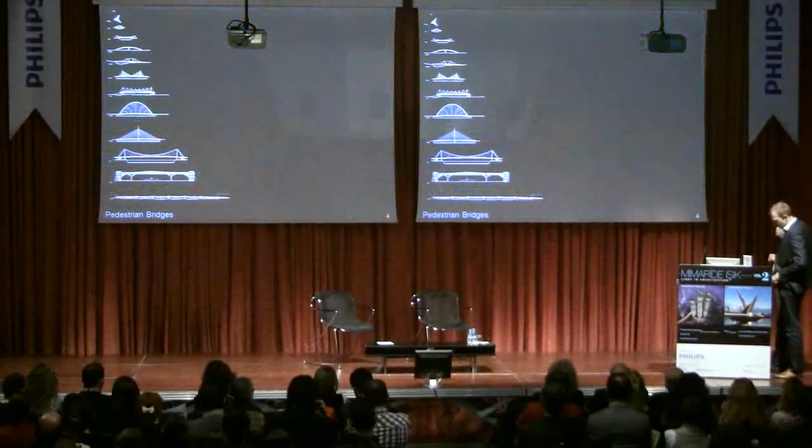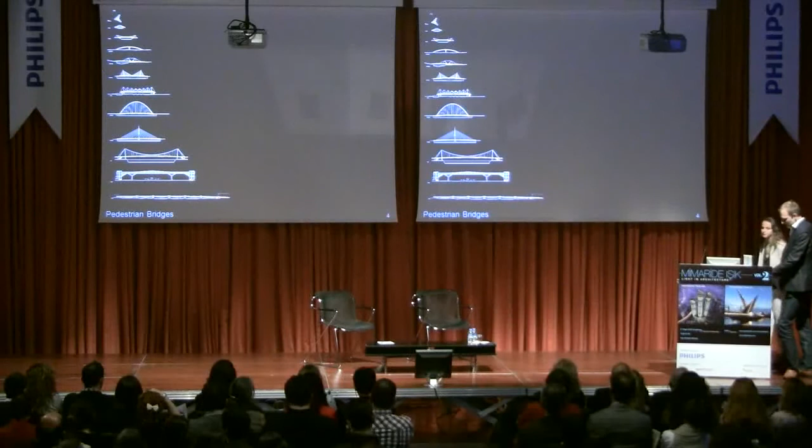What I love about my job, because I'm a specialist bridge designer, not buildings on the whole, is the variation in the projects in terms of the appearance and the scale. This slide shows the variety of different footbridges that I've delivered over the years.

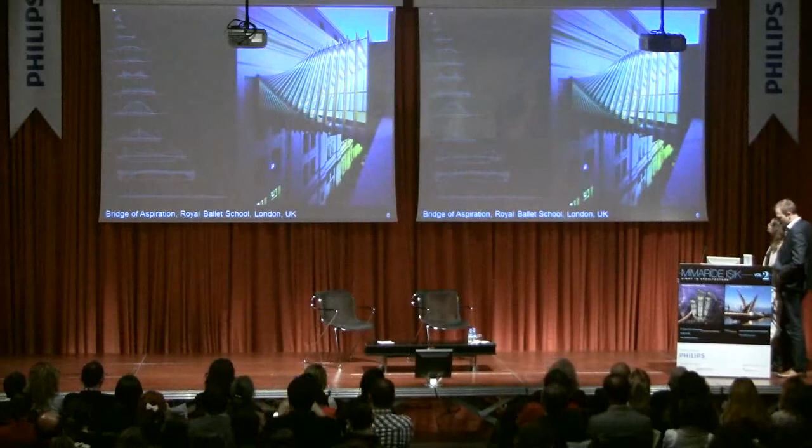This is one of the smallest bridges I've ever worked on - the Royal Ballet School Bridge in Covent Garden, built to link the ballet school with the Royal Opera House across a narrow urban street. Speirs & Major were the lighting designer.

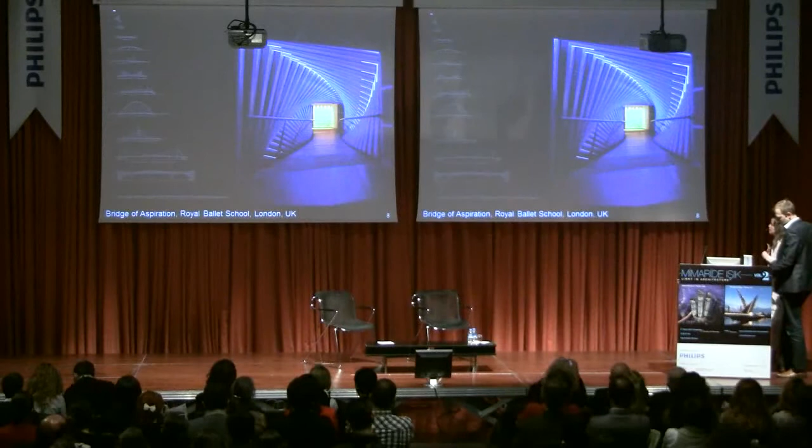The really interesting thing about this project for us, in terms of the client wanting an aspirational project, is that the link is only 9 meters wide. So the creation of a bridge in this location could have been quite a simple outcome. But Wilkinson Eyre took it to quite a different level with their architectural design, and obviously we wanted to integrate within that design without adding an extra layer.

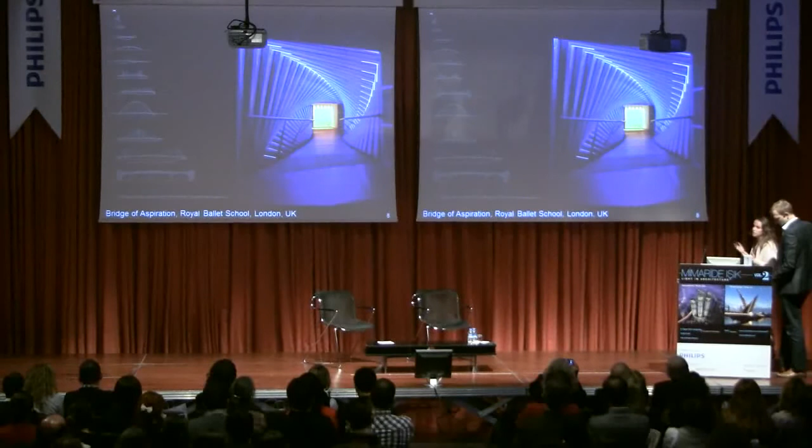By day, the bridge has a life of its own with the way the daylight moves over the structure, and by night we wanted to give it its own impression, but integrating so that we didn't impact it by day. So in the corners there's a very delicate recessed acrylic backlit with LEDs, so that it just reinforces the movement of the bridge by night.

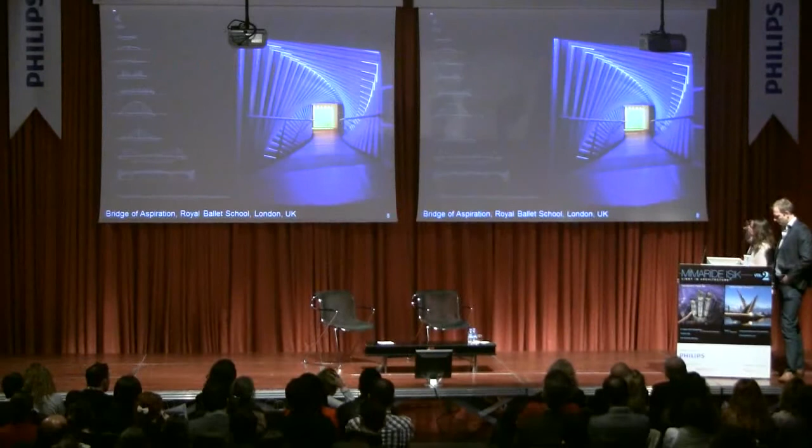So as the structures get longer and the spans become more onerous, you can see that the expression of the structure itself becomes more pronounced. This is a footbridge based on an inverted Fink truss that we each completed a couple of years ago.

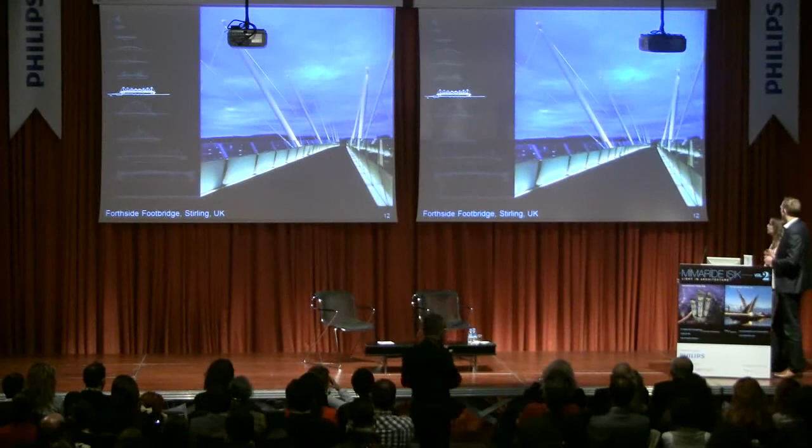And again, by night, what's interesting about this bridge is we've only lit the inside of the vertical components of the design. So in elevation, the bridge almost turns itself inside out by night. It gives you this texture and this depth to the nighttime image of the bridge.

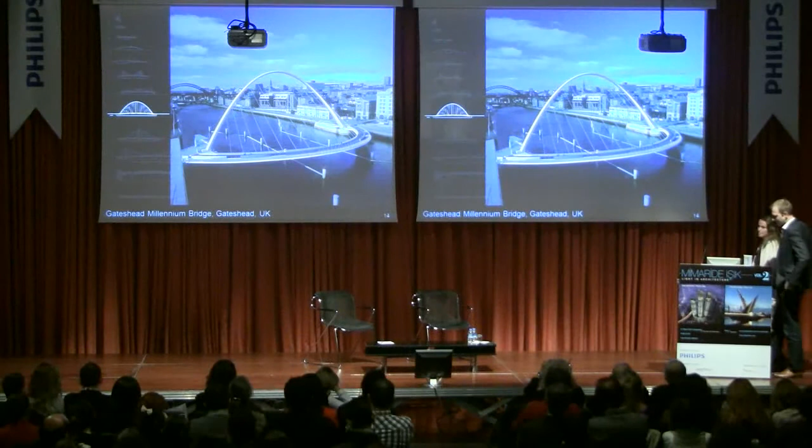As an architect, what I love about designing bridges is that you start with the big idea, the concept, and then you develop a structural form with the engineer. After that, you're straight into the little details. How does the handrail connect to the deck? How is the soffit of the bridge expressed? Does the deck touch the ground?

All the design in between that architects normally complete for a building is largely irrelevant. There is no insulation or weatherproofing to worry about, and on the whole there is nothing that can't be seen or experienced. So for me, bridge design distills architecture down to its essence, and you only do the fun bits of design.

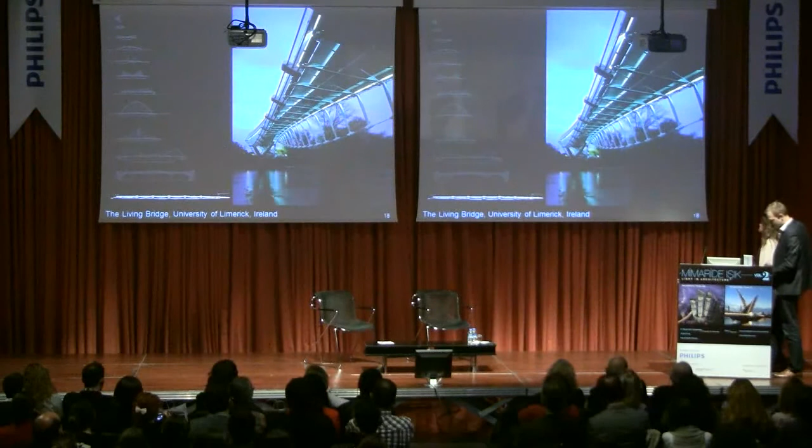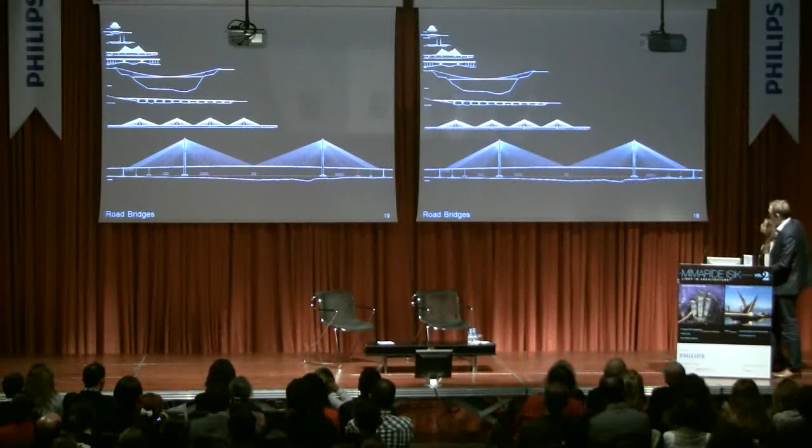Something else I love about the work is the variety. So we started off showing you a 9-metre long bridge in Covent Garden, but I also worked on this bridge at the bottom of the page, which is the Sutong Crossing in China, which has a clear span of 1.1 kilometres, and when it was completed in 2007 was the longest bridge on the planet for a time.

But we're talking about this bridge, which is the Twin Sails Bridge in Poole, which, on the scale of things, is quite a modest structure, but hopefully in the course of this talk we'll show you how it's a very successful example of the collaborative process between the different disciplines.

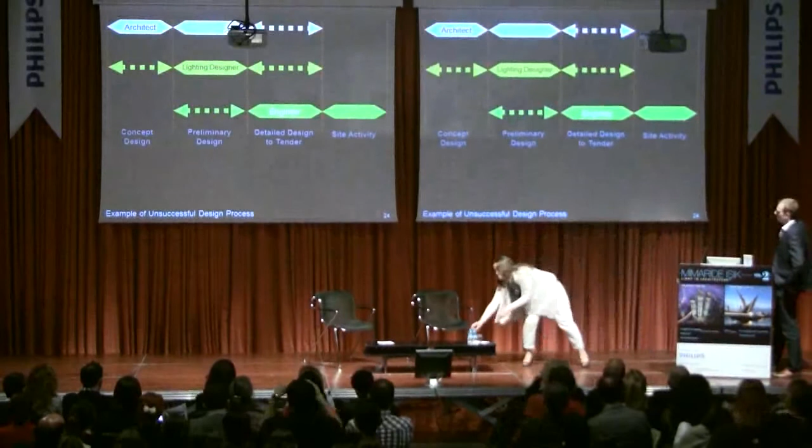So how should multidisciplinary teams work with each other, each with their own skills and agenda, to produce a single, beautifully coordinated project? To answer this, we're going to start by giving you some examples of how the design process should not work. So this slide shows a simplified design program for an unsuccessful design process.

In this scenario, an architect is invited to develop a concept for a bridge. The client, who might have little or no grasp of structure, buys into the concept, lured by its visual aspects and often a render of a colourful lighting scheme. The architect is commissioned to develop the design, and only then is an engineer employed to make the design stand up.

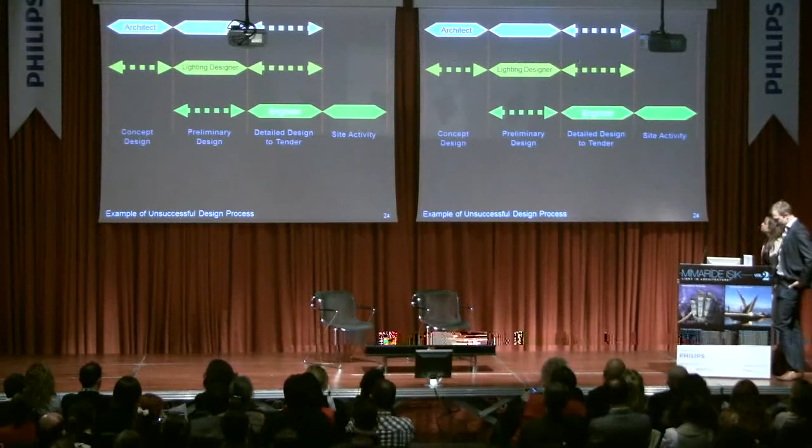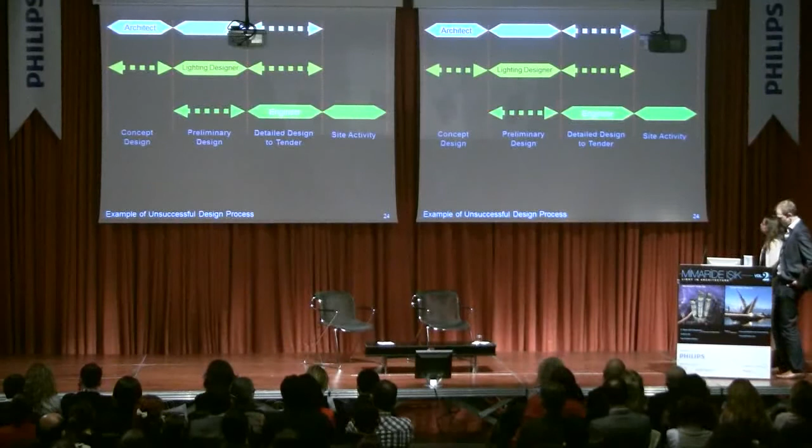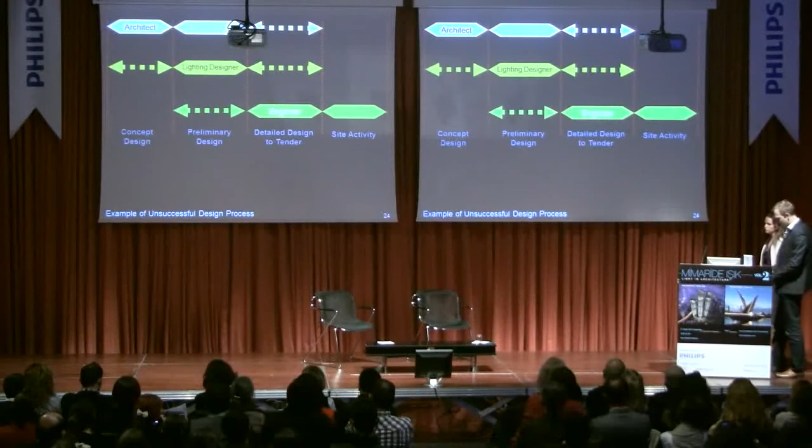From my experience, this approach seems to be normal operating procedure for bridge procurement in the Middle East at the moment. And sadly, it's also becoming more common in the UK, with the Royal Institute of British Architects launching often unsuccessful bridge competitions. I'd like to reiterate that this is not how we think a bridge should be procured. An engineer needs to be involved from the outset because they understand the physical fundamentals of structures. Some architects don't. So the result of a program is a structure like this one.

This is the Dubai Smile. It is unique, but there are sound physical reasons why nobody has developed a structure like this before, especially to carry a major highway several hundred meters over water. At first sight, the structure appears to be a suspension bridge, but the catenary is an inverted arch, and the arch isn't supported at its ends, but cantilevers from a position over the water.

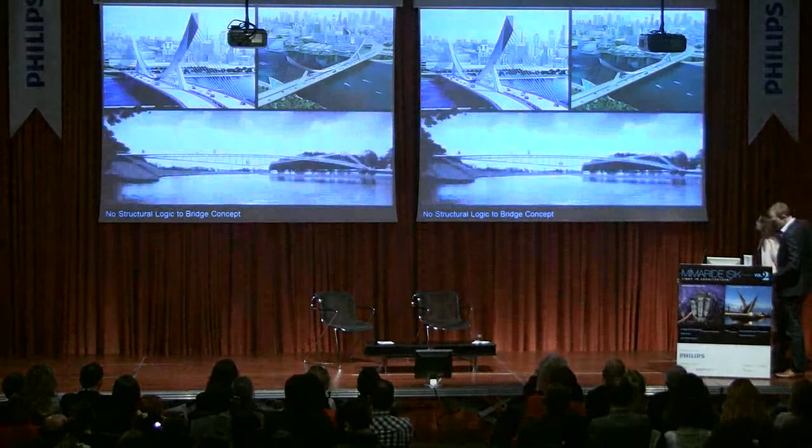Sadly, there are more examples like this. This was a competition for a footbridge in Krakow, and this is the winner. You'll notice that the weakest part of the bridge, where the arch meets the underslung catenary, there is no support, so simply put, this bridge can't stand up.

And here are two infamous examples from the UK. The first is the Wear Bridge in Sunderland. This is the competition-winning scheme. Although an engineer was involved at the outset of this design process, he was swayed by the architect's insistence that he didn't want to have backstay cables to transfer the loads from the mainstays that support the roadway. The result is undeniably dramatic, but completely inefficient and therefore gratuitously costly.

The second image is the winner of the Neptune's Way footbridge competition in Glasgow. Having won the competition and been commissioned to develop the design, the engineers very quickly realised that the architect's vision could not be made to work, and as a result the project was abandoned and a design and build competition was relaunched for the same site several years later.

All of these are examples of over-ambitious architects trying to establish unique icons for their clients. The results might be unusual, but they are visually confusing and misinformed. For these designers, the bridge is seen as a sculpture on a massive scale.

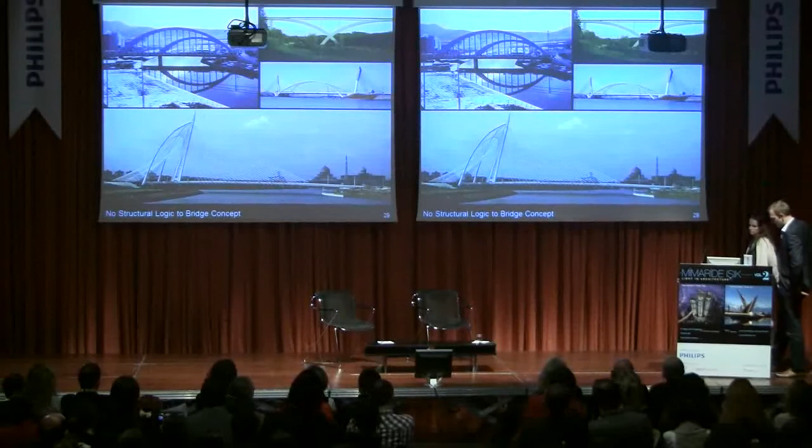The original purpose of the bridge, to cross an obstacle, is lost in the clamour to provide something visually arresting and attention-grabbing. Bridges are performing structural gymnastics to support themselves across the void. Designs have lost sight of their reason for being, and context becomes meaningless, and references to the environment being traversed are ignored or even considered irrelevant in the pursuit of a gimmicky object which demands attention.

If we look to the United States, the reverse problem is true. In America, architects are commonly perceived by clients and engineers to add fluff to bridges. Architects are there to choose the colour of the paint or to apply some cladding, often pseudo-historic, but not to inform the design in any meaningful way.

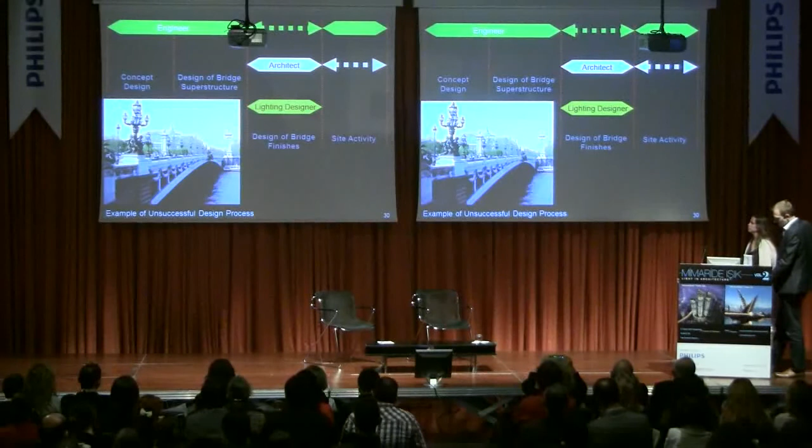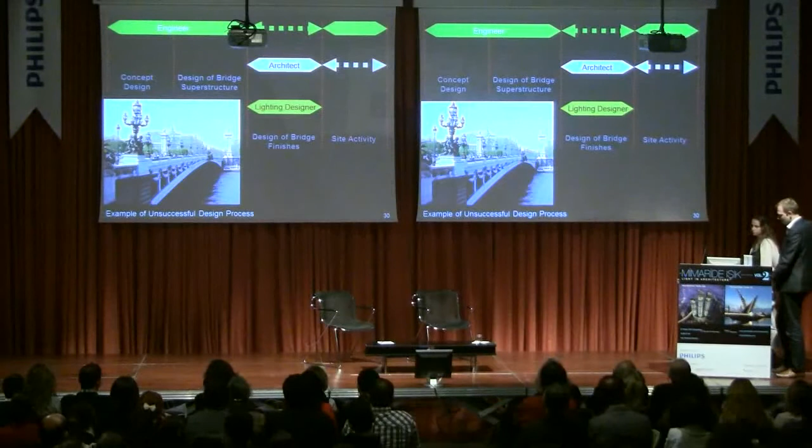This programme represents a common American model for involving an architect in the design process. An engineer develops the design for a bridge, working alone to establish the span configuration, choose the typology of the structure, its scale, its alignment, and in short, the whole structure is often predetermined before an architect or a lighting designer becomes involved.

The result is that American bridge architects simply design balustrades, apply some cladding, or propose motifs and relief to the engineer's concrete. At this stage, it is too late to input into the fundamental spatial arrangements of the bridge. The value that an architect could have brought to the design process is lost.

And for a lighting designer, it's even worse. They find themselves simply choosing light fittings to retrofit to the structure as an afterthought. So, how should lighting designers, architects and engineers work in harmony to produce a beautiful yet functional structure?

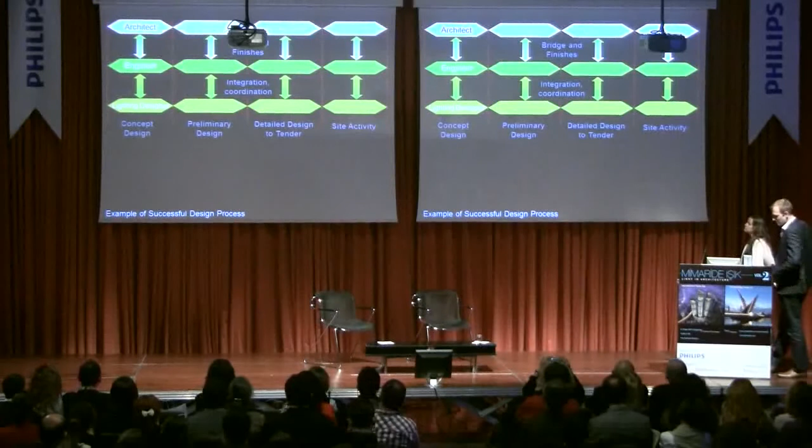In our experience, this is best achieved by close collaboration for the full design process. The design process is completely iterative, with each discipline reacting to and evolving their design ideas in concert. Each designer is respectful to the skills and experience that their counterpart has to offer, and every detail can be resolved such that it is both functional yet beautiful.

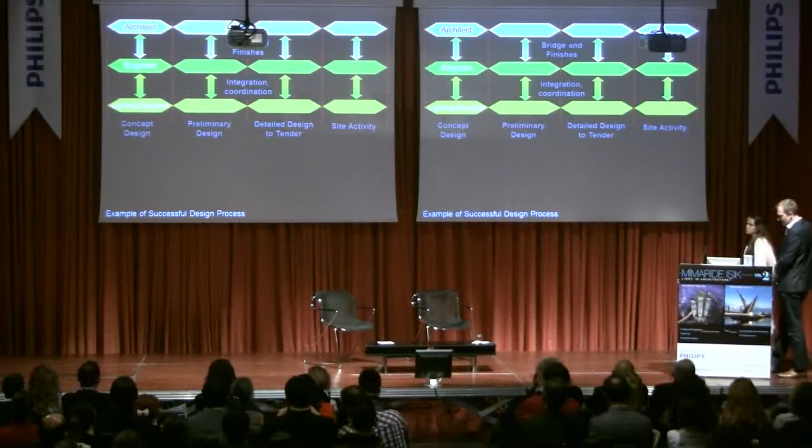The bridge and its finishes are designed as a homogeneous object and not as a superstructure with applied adornment. For the rest of this talk, we intend to demonstrate this process with our case study. For this project, the lighting designers, architects and engineers developed the project in parallel as a cohesive product from inception to completion. I'm going to start by giving you some background to the project.

For those of you not from the UK, Poole Harbour is on the south coast of England. The harbour is said to be the second largest natural harbour in the world, behind Sydney Harbour in Australia. It's a stunning natural habitat and an area of special scientific interest. The bridge crosses a tributary leading to a large bay to the north of the harbour itself.

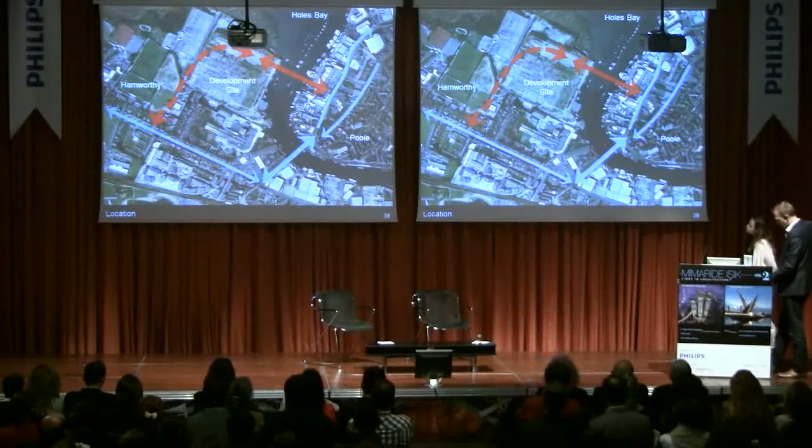Holes Bay is a popular mooring location for private yachts. It's also where Sunseeker motor yachts are manufactured and where the local lifeboat station is based. And as a result of this channel linking Holes Bay with Poole Harbour, it is extremely busy, and the existing bridge opens once every hour, every day of the year.

However, with populations increasing, the existing bridge has also become a bottleneck for road users, and when out of operation causes major access problems for the local residents. As a result, the client, the Borough of Poole, launched a competition for a new bridge in 2002.

Following their success on the Gateshead Millennium Bridge, the same multidisciplinary team of Gifford, Wilkinson Eyre Architects and Speirs and Major reassembled to enter the competition.

As always, the first thing we did was visit the site. What struck us was the horizontality of Holes Bay and Poole Harbour, and of Poole and its suburbs. There is very little man-made here to punctuate the horizon, so you get long-reaching views to the New Forest and the Isle of Purbeck, both local beauty spots. As a result, we felt the bridge should be very low-lying and modest, with little structure above the deck. Since the bridge will be down most of the time, it should be calm, modest and discreet.

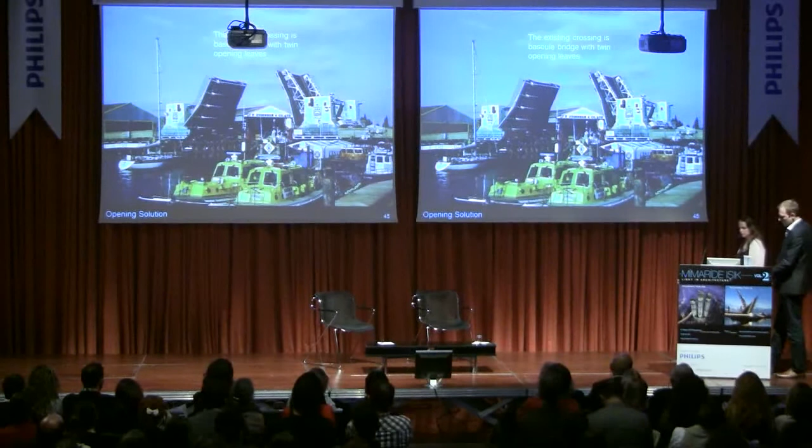Having decided the bridge should be as low-key as possible when shut, we needed to decide how it opened. The existing bridge is a bascule bridge: twin leaves pivot open about a horizontal transverse axis, like the drawbridge on a castle. The client preferred bascule technology based on the robustness of their existing structure, and as a design team we were also drawn to it since it didn't rely on large overhead lifting mechanisms. Probably the most famous example of a twin-leaf bascule bridge is Tower Bridge in London.

However, there is one issue with this type of mechanism. When both leaves are down, they act as horizontal cantilevers. For them to take vehicular traffic, it's necessary to lock the opposing leaves together at mid-span over the water to avoid large deflections under heavy loads. More often than not, it's these remote locking mechanisms that fail rather than the opening mechanism itself.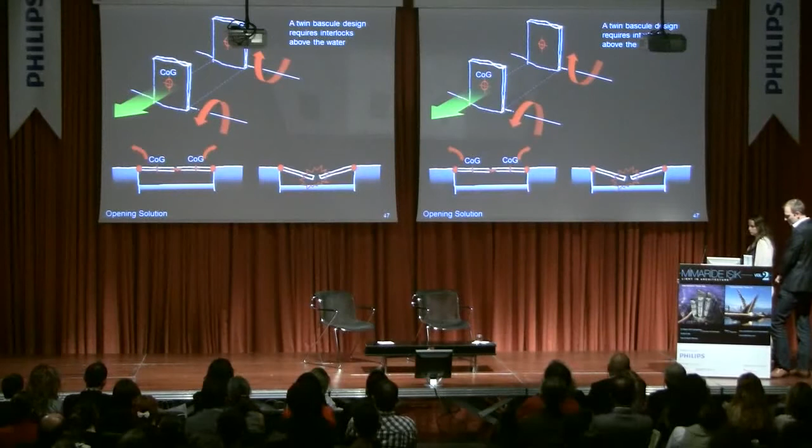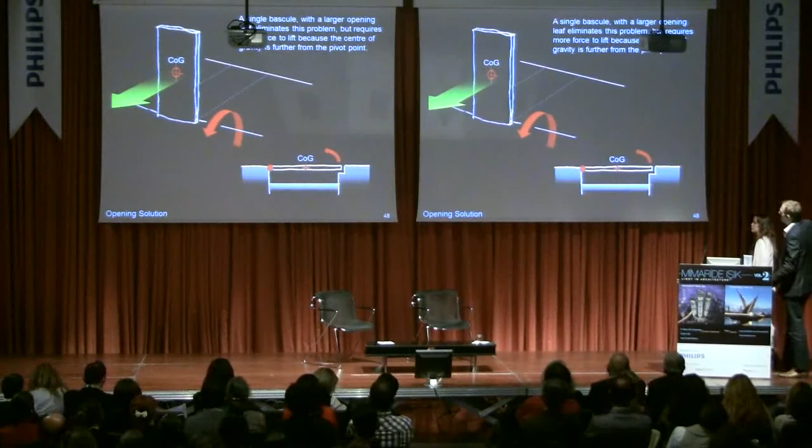One way to avoid this problem is to use a single bascule leaf, twice the length of the dual system. The advantage is that the lifting leaf can be laid down onto the opposing abutment - there are no locking mechanisms, and the bridge is held in place by gravity alone. The disadvantage is that for the same size opening, the centre of gravity of the mass to be raised is further from the pivot point, so the bridge uses much more energy to mobilise it. For this reason, single-leaf bascules tend to have very large structures, which was visually not in keeping with our preference for a low-key and modest design.

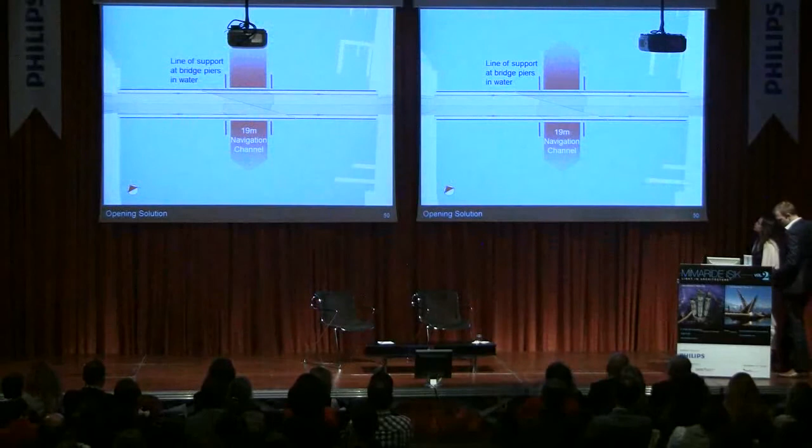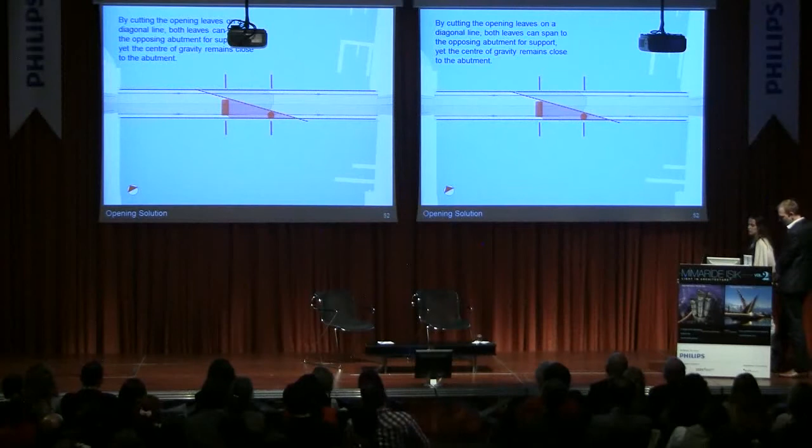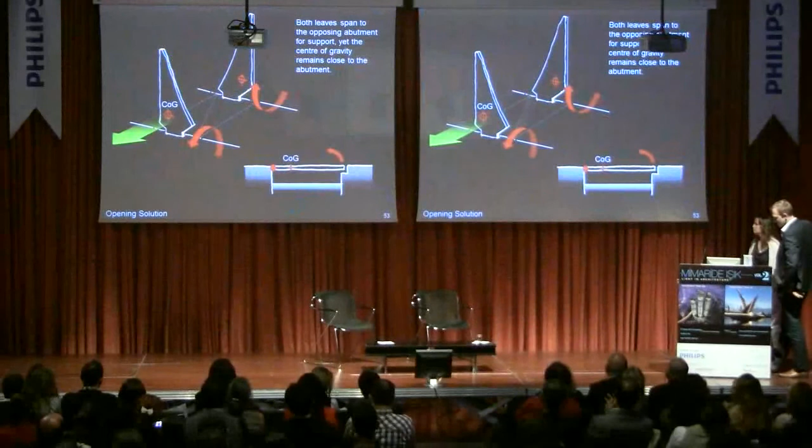We then started looking for other opening geometries, remembering the opening structure could have any form as long as we maintained a 19-metre wide navigation channel with infinite height above the water. We realised that if we cut the opening line between the two leaves on the diagonal, we could get the best of both worlds. Each leaf could extend to the opposing abutment for support, gaining the same benefit as a single bascule system, but the triangular shape would mean the centre of gravity for the movable deck remains near the pivot, reducing the force required to open the bridge to approaching that of the double bascule system. The centre of gravity is near the pivot because of the tapering shape of the bridge deck.

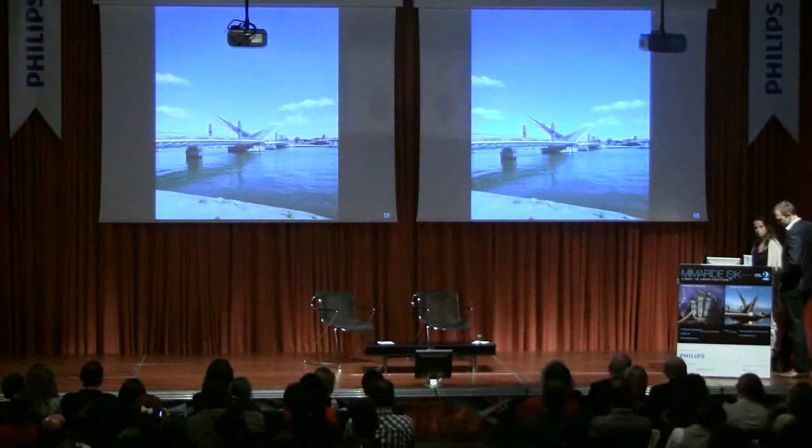This arrangement also leads to a very dramatic opening sequence. The quiet bridge is suddenly transformed into a piece of kinetic sculpture as large shards of tarmac are lifted into the air. There's also an accidental visual connection to the vessels in Holes Bay - it's difficult to ignore the similarity between the opening bridge and these tacking racing yachts.

When we approach the lighting design, our initial reflection is on the structural intent and the architectural image already created, or in the process of being created, by the architect and engineering team, reinforcing the identity, shape and form of the structure in the first instance. Interestingly, the expression of the structure and form of a bridge often provides a glimpse and understanding not apparent by day. Many of the hard thought-about details lie in shadow by day, but by night, with light and reflection, appear more distinct.

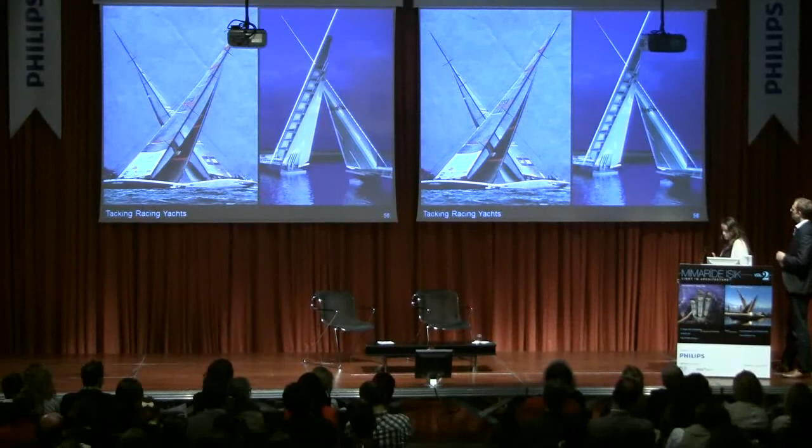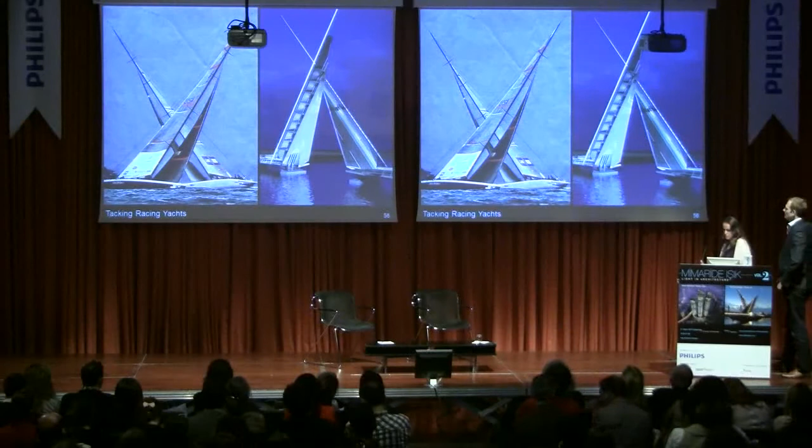It's also important on many of these structures to detail the equipment so as not to impact the structure and image of the bridge - always focused on the lit effect of the bridge against the nighttime sky and in the environment, without expressing any of the equipment. And then there's that little bit of extra, the magic, the moment of experience, which at nighttime seals the memory. So, to talk a little more in detail about Poole.

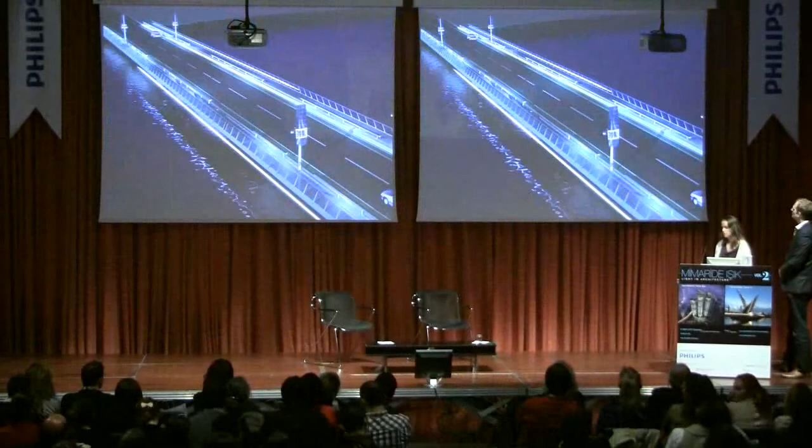The architect's initial impression of the bridge was a strong horizontality, keeping the bridge flat against the horizon, with a larger impact upon opening. So for us, it was really important that the lighting design should tie in with that.

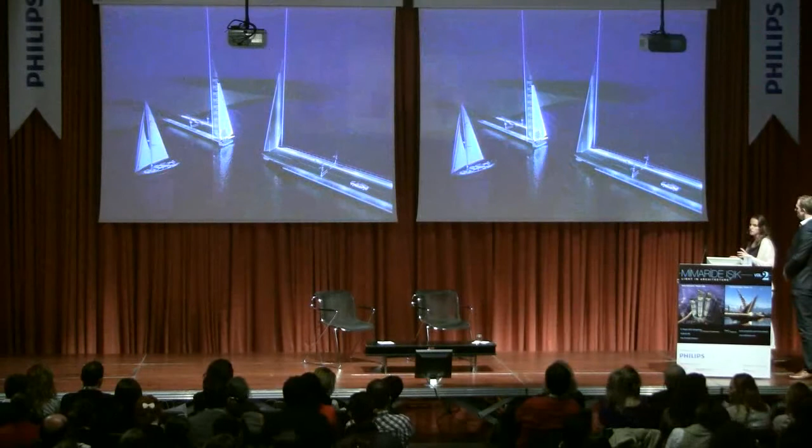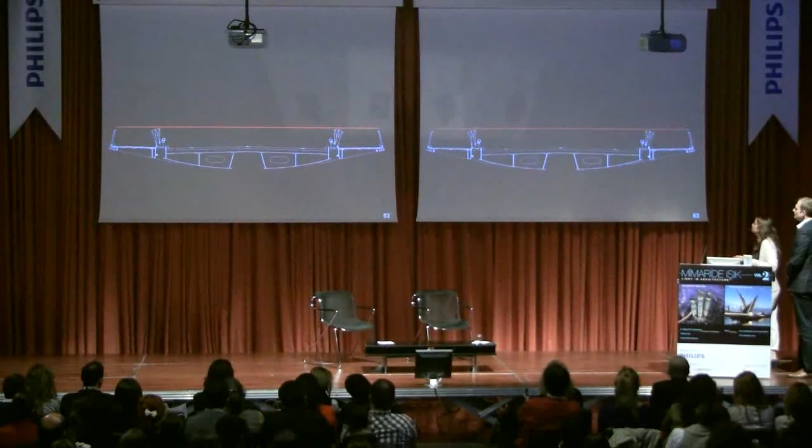When we went into the detailing, horizontality was the first element we needed to focus on. It's a bridge for road, pedestrian and cyclist use, so there were technical requirements and strict regulations that meant we couldn't do anything from a high level. We needed to keep all the equipment low, within the architectural line if at all possible.

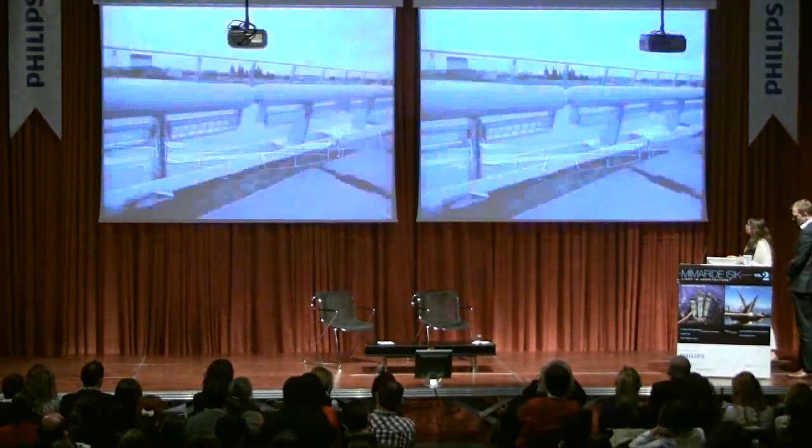So we achieved this by using luminaires detailed into the vehicle restraint system. It was a highly complex detail that passed between architect, structural engineer, electrical engineer, and lighting designer at least a dozen times to get right, because the vehicle restraint system had to meet extremely high specifications, as well as the supports from the base.

The luminaires had to sit back and be protected. We also had to consider, in case of an accident, quick replacement of both the VRS system and the luminaires to restore safety as fast as possible. So the luminaires were detailed so that if the restraint system buckled and cabling was affected, the lights would only ever go out in banks of two. We cabled up and over left and up and over right to limit the cabling affected in an accident.

This is the lit effect at night, keeping everything very low level and not impacting on the horizon. This also benefits from the fact that the horizon at night is currently quite a dark environment.

So we decided to enhance the presence of the opening bridge by extending carbon fibre booms from the tip of each opening leaf. In this way, the rather modest 20-metre opening span is transformed into something more significant as it opens, particularly at night, where a cluster of LEDs at the tip of each mast sweeps through the sky.

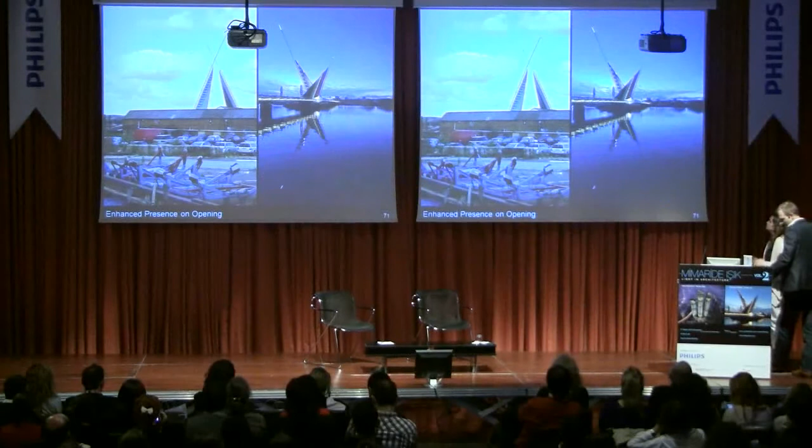The result is that the bridge is the only structure to break the skyline in Poole, but only when it opens. For the ten minutes or so of the opening sequence, Poole's skyline is transformed, visibly reminding residents of the maritime connection. Because the bridge opens on a regular schedule, its opening visibly marks the passing of time.

In terms of lighting, for us it was about enhancing the elements that moved upon opening - the underside of the sails of the bridge - and extending as high as possible into the night sky for that moment and impact of the opening.

Equipment was located on the piers to uplight the sails when open, and the edge of the tip - the carbon fiber mast - had an integrated lighting detail.

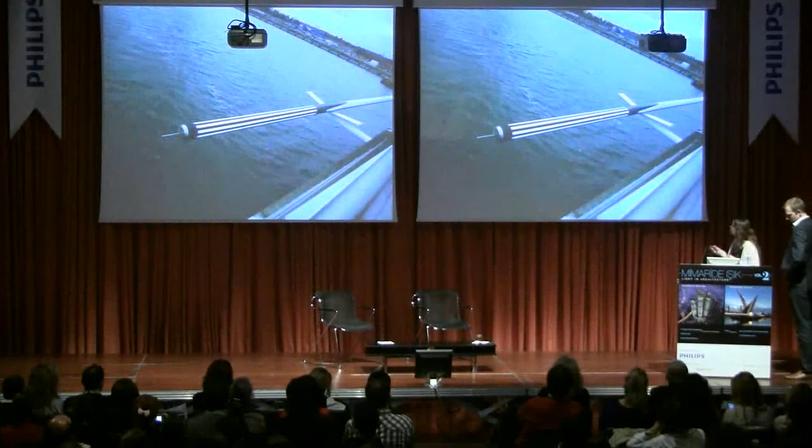The carbon fiber mast actually flexes upon opening, but at nighttime there are recessed LEDs behind acrylic panels that have been detailed and cast into the carbon fiber along its length. Just prior to opening of the bridge, this element lights up and then lifts, lit, into position.

Having established the concepts, we now have to make the whole thing work and hold together. Although the shape was inherently beneficial in terms of its centre of gravity, we still needed to reduce the weight as much as possible to minimise the energy of the bridge in use.

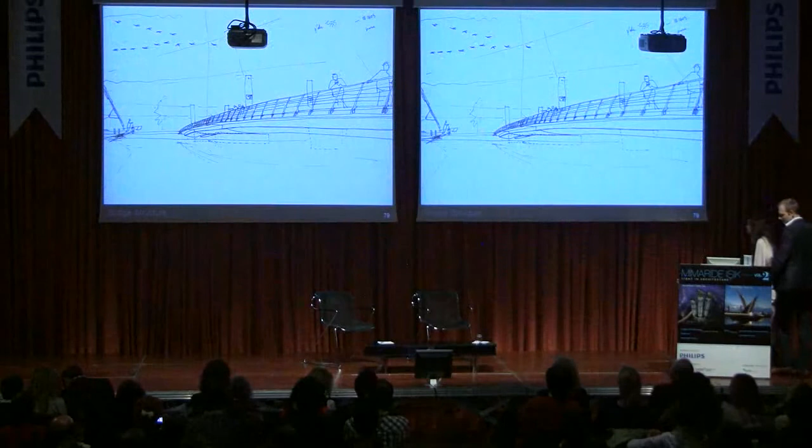The footway deck, shown in grey alongside the untreated roadway deck, is even lighter still. It's cantilevered from the edge of the road deck, expressed as a succession of tapered ribs at the underside of the deck, onto which we mount the lightweight aluminium decking system as the walkway for pedestrians. The footway tapers to a narrow edge so the whole crossing is understood as a simple line trajectory across the water.

And here we can see that arrangement in cross-section. The closed box shape at the centre, which gives the bridge its strength, with the more filigree footway extending sideways as cantilevers. We purposefully located the concrete bridge piers inboard towards the centre line of the bridge so that they would be deep in shadow and would not disrupt the trajectory of the deck edge.

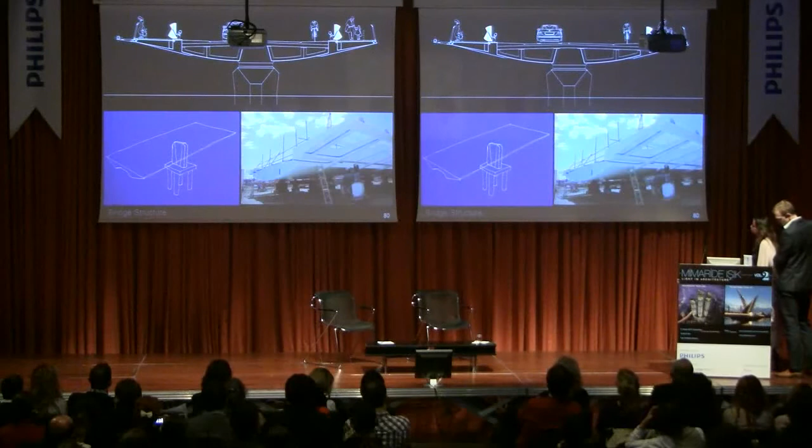The deck edge is also angled upwards to catch the light so that in all weather conditions the bridge is understood as a simple ribbon of structure between abutments. You can see that the overall result is very successful. For a highway structure that has to take articulated lorries, the deck appears extremely slender and has minimal disruption on the context of the bay.

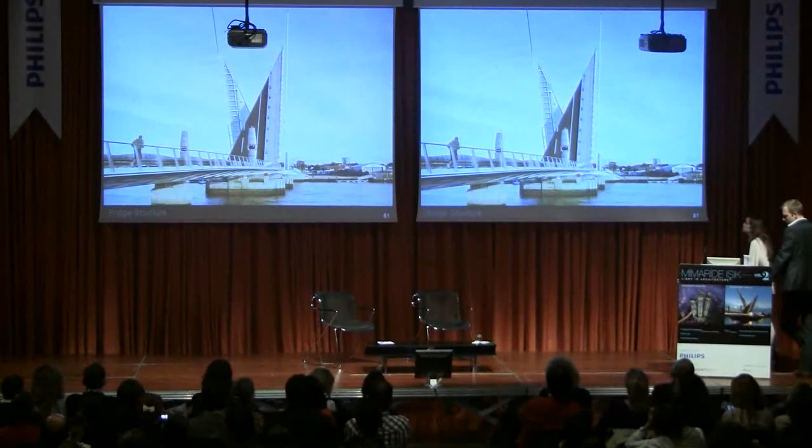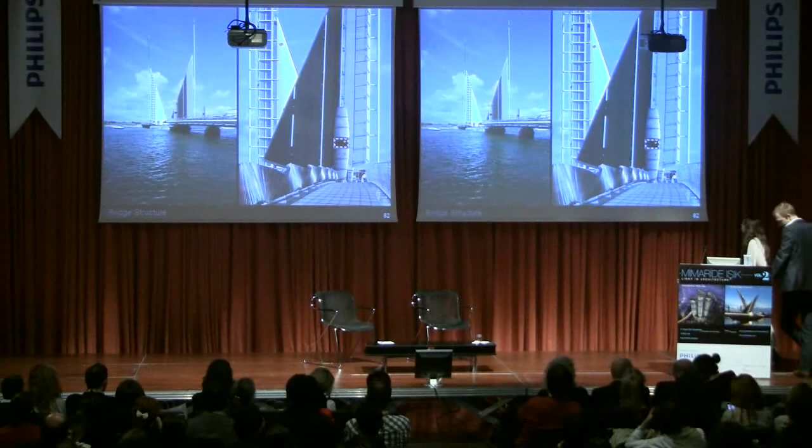Because this bridge opens, we had to treat the soffit of the bridge with the same care and attention as the elevation. Every piece of structure is therefore shaped to be both structurally efficient and visually refined. There is no architectural cladding on this bridge. Everything you see here is the primary steel structure, and nothing is superfluous.

For us, when we start talking about the structure of the bridge, the main box section and the ribs as they extend out to support the lightweight pedestrian deck on the edges, the ribs are quite expressive. And in a similar way to Gateshead all those years previous, it was quite an advantage for us to be able to light them. They continued with the idea of horizontality of the bridge.

They allowed the structure to be expressed, and this is the one that is, as if, in shadow during the day, but is expressed at night. It also enhances the impression of the bridge by the lit reflection at night.

The luminaires used to do it were tucked beneath the deck, adjacent to the ribs, in a relatively complex detail, with all the conduit to allow for maintenance and access from above the deck. So the luminaires rotate on a pivot arm and can be accessed from above the deck for ease of maintenance.

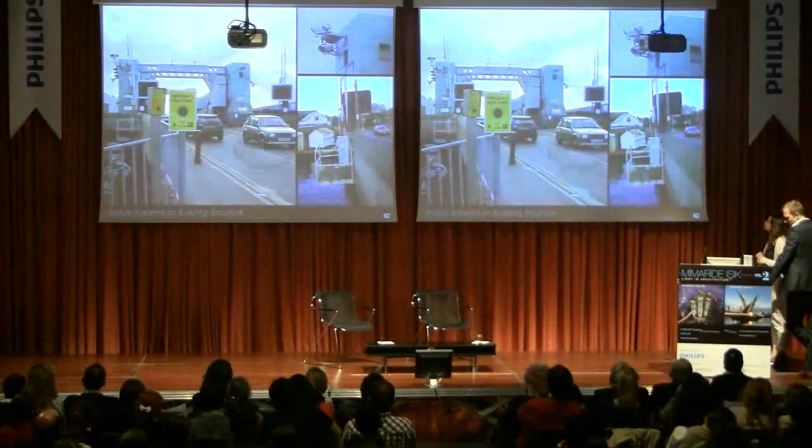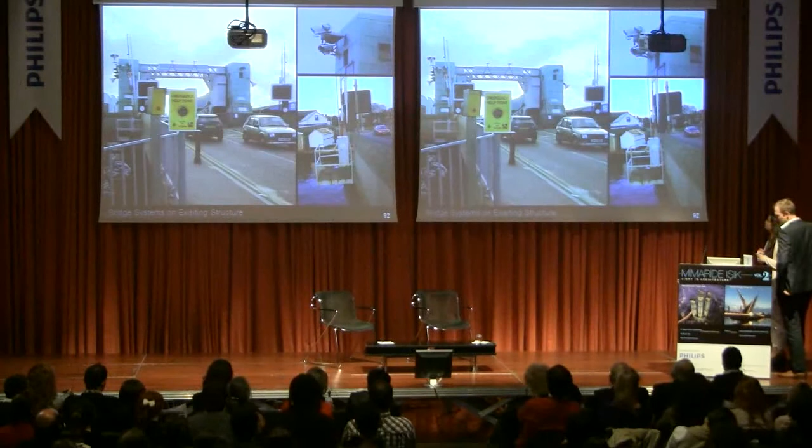Another issue we were determined to solve was that of the mechanical and electrical equipment on the bridge. There's a surprising amount of equipment required these days to ensure the safe operation of an opening bridge, and this slide shows the existing structure. As well as the opening systems, there's CCTV, audible sounders, tannoy systems for pedestrians, tannoy systems for the marine traffic, physical barriers for the highway and for the footway, and visible warning signals. As you can see, these systems can all add up to a lot of visual clutter.

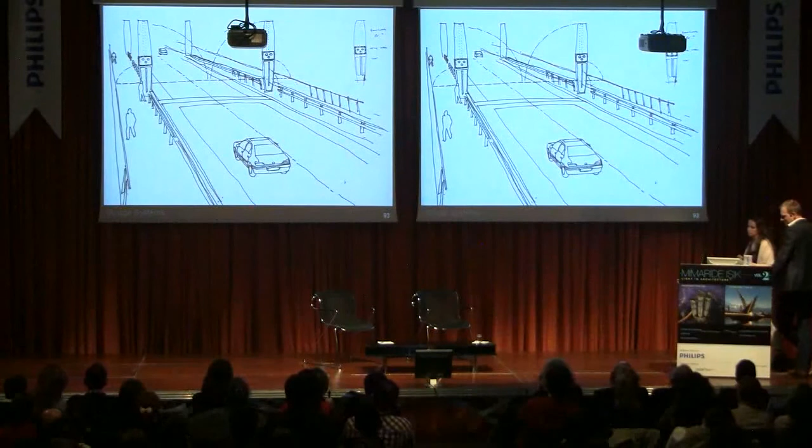On our bridge, all of these systems are located into 4 totems located at the edges of the opening leaves. By concentrating all mechanical and electrical systems into these elements, we were able to maintain a calm and uncluttered bridge deck. This slide shows these totems from one of the approaches to the crossing. Although highly visible for safety reasons, the restrained palette of perforated stainless steel and simple curved shape is in keeping with the refined aesthetic of the bridge.

You can see how effective these totems are at accommodating all of the statutory and safety equipment for road users, pedestrians and marine users on the water. As well as visual and audible sounders, CCTV and communication systems, the totems also contain physical barrier arms which drop down to close the bridge before it opens. Although, of course, once the bridge does start to open, it forms its own unambiguous visual barrier.

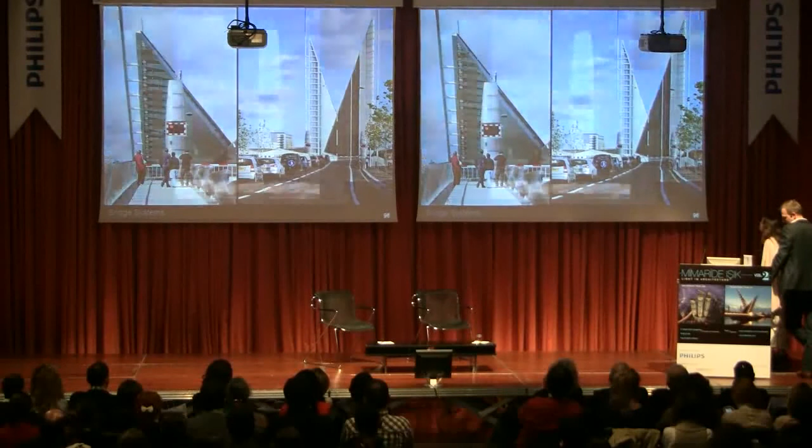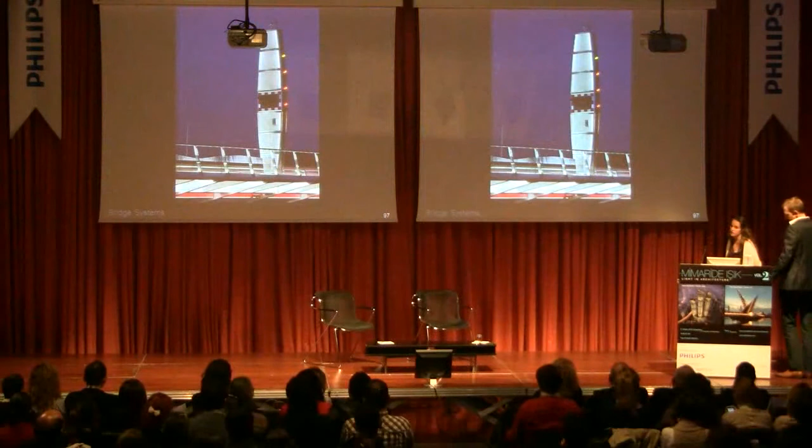For us, for this one element that actually breaks the horizontality, we discussed a series of things, and the idea that the surface was perforated to allow light behind it, a soft light, not to be stark against the night sky, but to just give this element that actually does require an enormous amount of technical integration within it, a little bit of life against the night sky.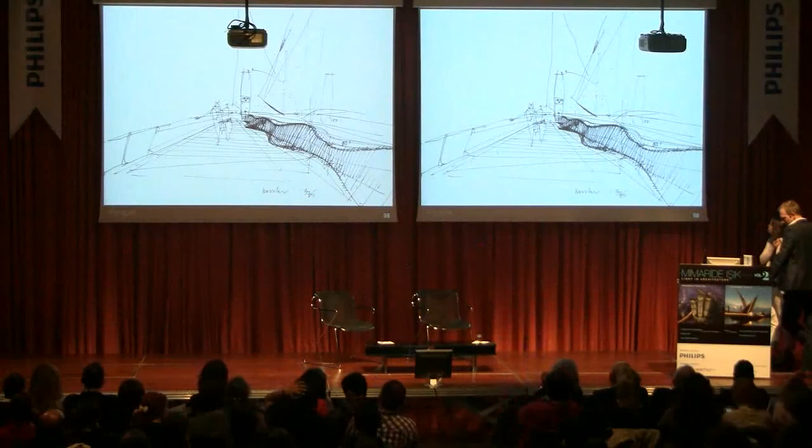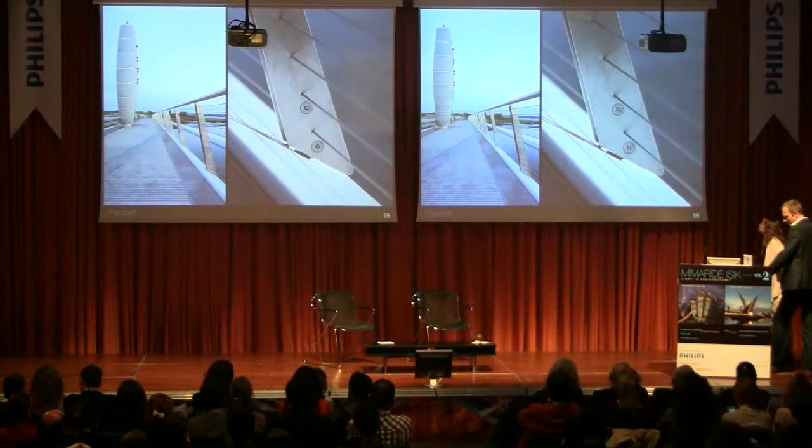The other finishes on the bridge are kept extremely simple. We used aluminium and stainless steel throughout for their robust properties, and at the deck edge we wanted the pedestrian parapet to be as visually light as possible. We chose stainless steel tension wires as the infill material. These disappear in long views of the bridge, and the parapet system is inclined towards the pedestrians to give an enhanced sense of enclosure despite the visual porosity of the infill. The inclination also helps to discourage children from climbing up and over.

The next element of the parapet was how to light the statutory lighting requirements for pedestrians. To keep with the low-level requirement, it seemed obvious to use the handrail. This project started back in 2002, and the continuous linear LED we asked for was near impossible at the time, but we figured by the time it was built 3 or 4 years later it would be possible. 9 years later, it was possible, and we achieved quite a nice integrated detail with LEDs to light the pedestrian deck in a relatively unobtrusive way.

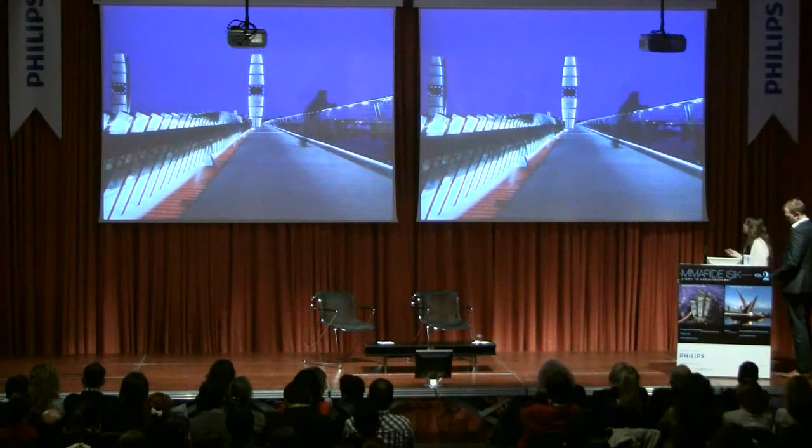We were extremely conscious of not having any spill light back onto the water, limiting glare to the mariners, and just lighting the surface that really needed to be lit. So that's achieved, and the handrail itself does a tougher job, which we'll talk about in a second.

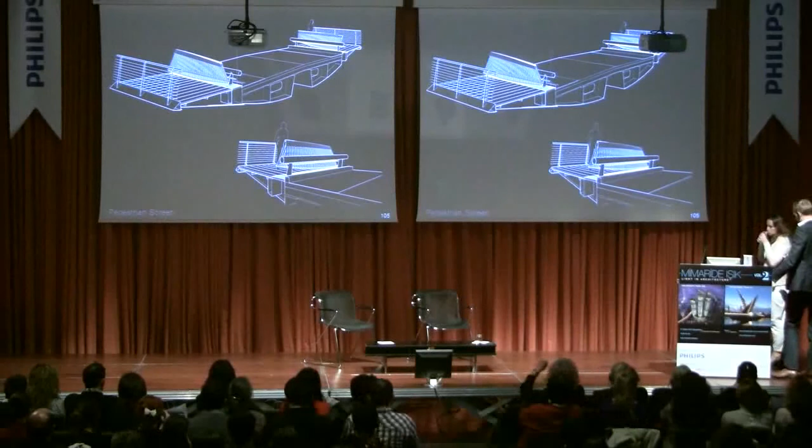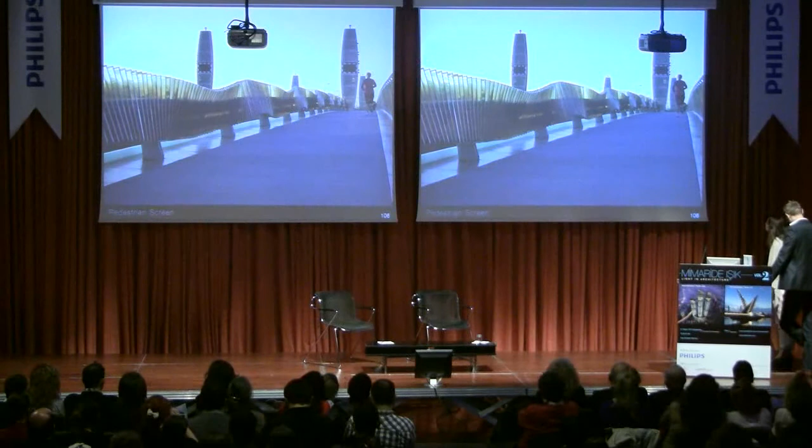Between the footway and the roadway there's a further balustrade system, and this screen performs a number of functions. Made up of a series of flat steel plates, it's imperforate in oblique views. This has the effect of divorcing the pedestrian from the highway and making them turn their attention outwards to the sea, making the crossing of the bridge a more pleasant experience for those on foot. The screen also prevents errant pedestrians from crossing onto the road to walk around the footway barrier, which has to close before the one on the roadway. In addition, the screen conceals the highway crash barrier and the lighting systems from view, and acts to reflect light onto the footway from a void beneath the road deck.

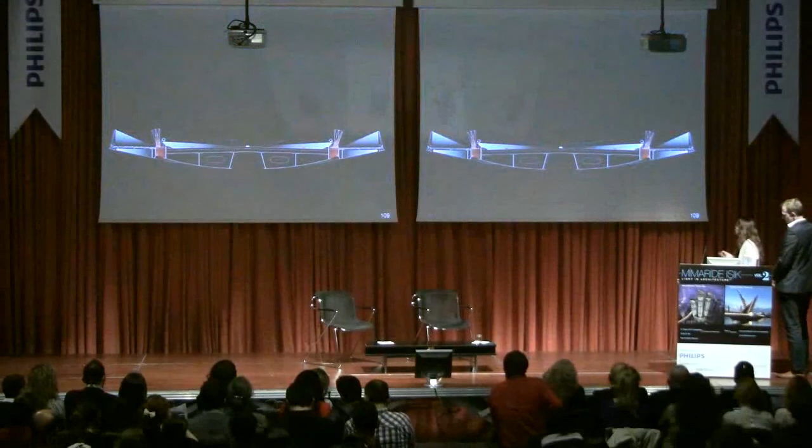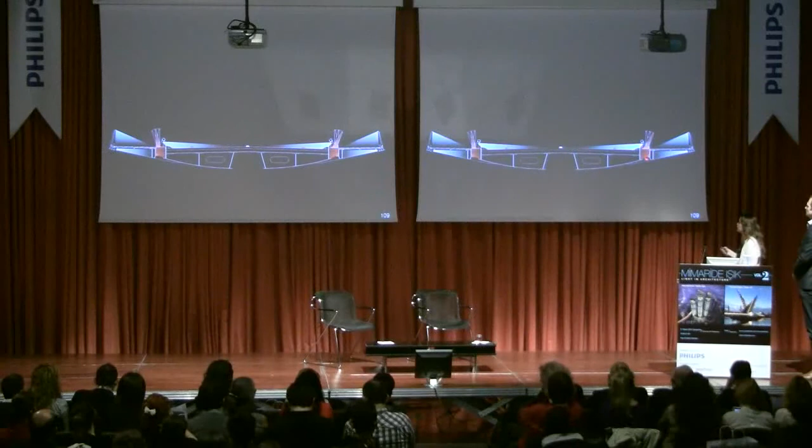For us, the relationship of the screen and the box section against the lightweight pedestrian deck left an opportunity to express the architectural intent beneath the screen, so we uplit the screen. Previously, in concept design, it was a more open structure rather than a solid fin structure, but it still takes the light quite well, and the grille beneath it glows with a red glow, which is also reflected in the water by night. So it acts as a contrast between the two decks, reinforcing the job the screen is doing for protection by night.

So to the extra moment, the extra magic, and the extra layer we decided on in terms of the image at night: we discussed with the client adding, on top of the architectural image designed by James and his team, a layer of light animation that worked in line with the bridge's opening. Because for us, the magic of the bridge is in the way it opens. There are many opening bridges, but the sails opening against each other and the triangulated leaves really is quite a special moment in time. So we wanted to enhance that by night and make more of an event of it in the evening.

So we discussed with them the integration of a color change of light. Very specifically, not a color change for any moment of the year - red for Christmas, purple for Easter - but just about the bridge itself. On impact and opening of the bridge, it would take on a slightly different effect: you have your standard evening, and as the bridge opens, or just prior to opening, as the leaves begin to break apart from each other, the light begins to change and roll down the deck, then changes back again just before. So as a pedestrian, you're engulfed in a slightly different light and effect.

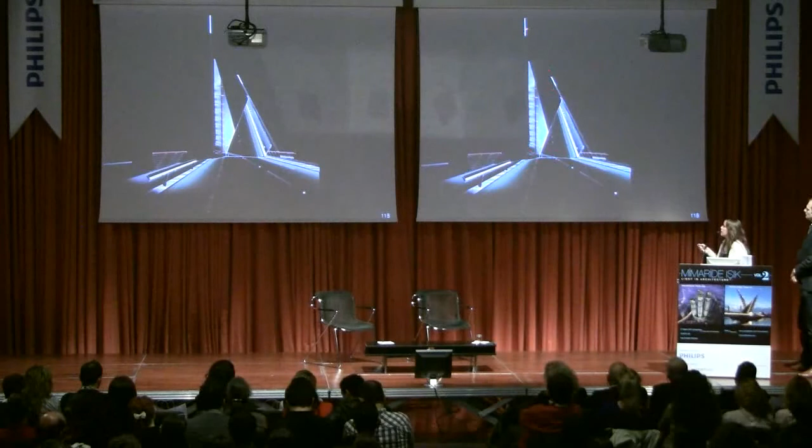After you have all your statutory lighting and all the elements on the bridge, as part of the opening sequence of events, the sail is underlit and the mast lights come on. Then, as the bridge actually breaks open, the pedestrian deck changes from white to red.

This was an early concept image that also increased the impact of the opening by having light actually flow from the break of the deck. But in development of the detail, it's quite a complex detail in terms of the loads it needs to take and the locking mechanisms. After lots of discussion, it was something nobody wanted to let go of, but in the end we had to. And the bridge would turn from white to red.

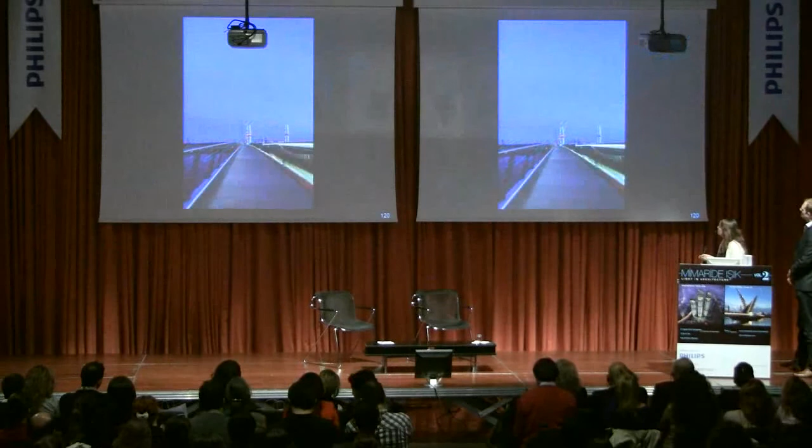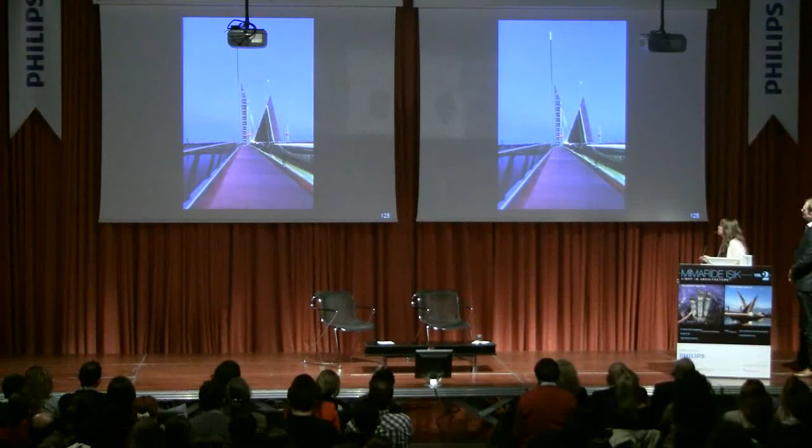One of the early references for that was a kind of lava flow that would engulf you, and then there is the extension with the mast, which has been detailed in. So as the bridge moves up, the lighting simply changes from white to red. There are a whole series of events that occur: the totems do their job, the barriers come down, the lights flash, pedestrians are told to stop, the mast lights come on, the lights come off to light the sail, and then the red light starts as the bridge opens.

I think for us, in conclusion, the composition of all of these elements is what made the nighttime image. It wasn't one specific piece, but linking with all of the architectural intent and taking clues from the structural rib design and the opening of the bridge created by Wilkinson Eyre, and adding that level of impact upon opening, created an iconic image and experience, both by day and by night, which increases the impact on people's psychological connection with the bridge, which for us is really important.

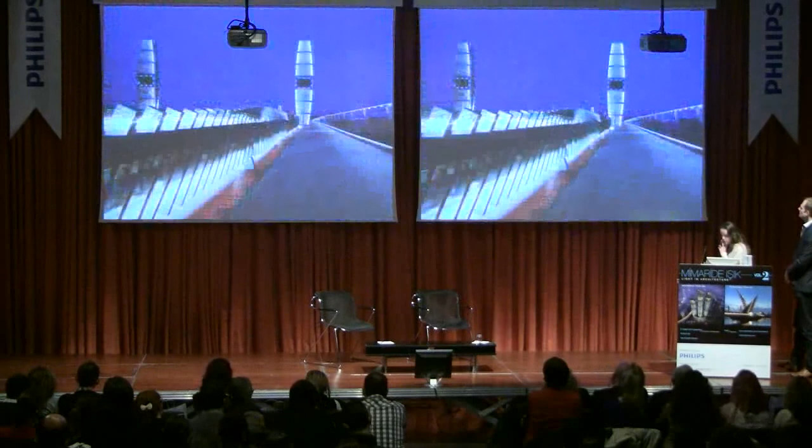It allows people who live locally to take possession, and people who visit to capture the memory. These relationships we create with places we live and visit can't be taken lightly. It's a social engagement which drives people's pride, their connection, and their interaction with where they live. They spark a social interest, communication, and ultimately aid in economic growth. In our current climate of web-based communication, the quick marking of a memory with a snapshot and a caption and posting it for all to see is a record of that engagement.